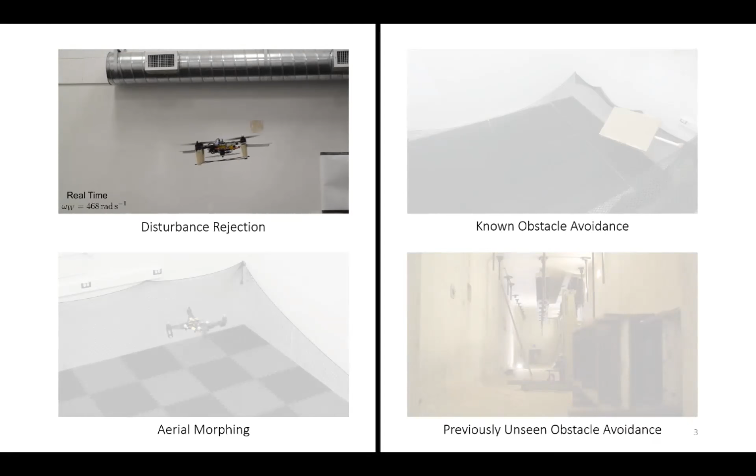If these videos are a little hard to see, don't worry, we'll watch them in much more detail later in the talk. Then we'll look at a second type of vehicle that's able to change its shape mid-flight, and discuss how this enables the vehicle to do several different tasks that a normal quadcopter wouldn't be able to accomplish.

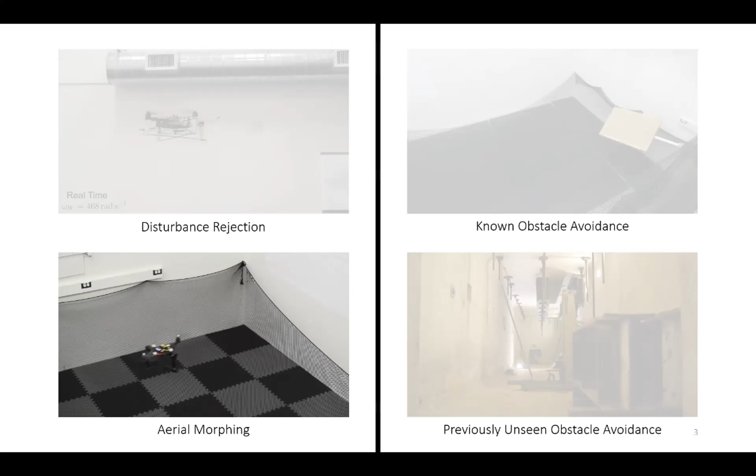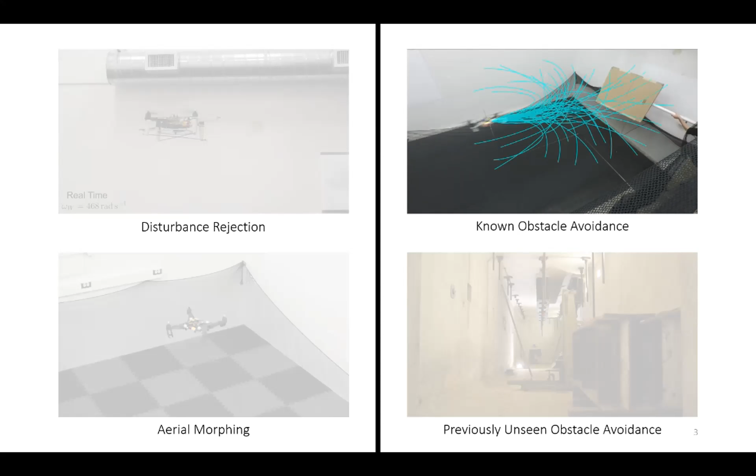In the second half of the talk, shown on the right, I'm going to discuss 2 novel collision checking algorithms I've developed to enable autonomous flight using computationally constrained hardware. More specifically, I'll first talk about an algorithm used to detect when a candidate quadcopter trajectory is going to collide with a convex obstacle, and how to do that very quickly.

In the second project, I'll look at how we can extend that type of collision checking into environments where you have previously unseen obstacles—where you're using, in this case, depth images from an onboard camera to navigate through environments autonomously.

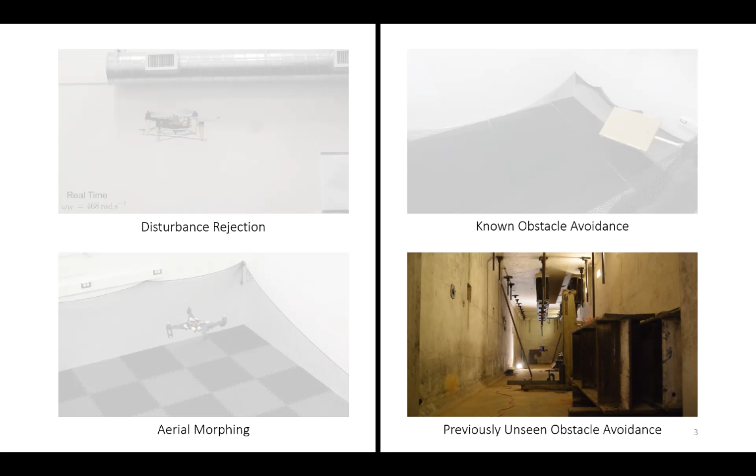Before we dive into the details, it's important to highlight some key parameters that affect quadcopter designs, so everyone has an idea of what we want to be thinking about when doing these incremental modifications. This is by no means a comprehensive list, but it's kind of how I would think about doing quadcopter design. Specifically, ideally we want a vehicle that can fly for a very long time, has reasonably high agility, and also a very low cost.

There are different ways of achieving these goals, but at a high level, ideally what we want to do is minimize the mass of the vehicle without significantly reducing the maximum linear and angular acceleration the vehicle can produce, and ideally not add any super complex mechanisms.

What about payload? Yeah, I guess that would go into low mass. Are you talking about... yeah, I guess the usefulness of these vehicles is adding certain payloads. So the lower the mass of your vehicle, the more budget you have for adding a payload. No, what I meant is you might want to increase the mass so that you have enough power to pick up a 5 kilogram package. I mean, lowering the mass by itself... Oh, I should specify, I'm talking about a specific size of vehicle. If you need to carry something very heavy, perhaps you move up in vehicle size, which would increase the mass, right? But given that you say, okay, this is my vehicle and I want to keep it this size, and carry this payload, then starting from that point, you don't want to be using steel arms or something that are super heavy.

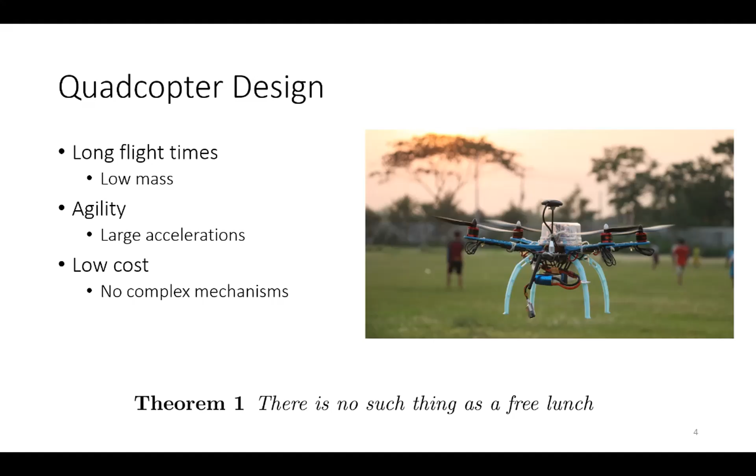I'm going to start by talking about this first project. In this case, we're really interested in flying quadcopters in very extreme environments. This started out by thinking about how we would fly a quadcopter in, for example, a hailstorm, or near a tornado where there are very large wind shear forces. Specifically, in this case, I'm only going to focus on environments with large torque disturbances, and the way we're going to reject those torque disturbances is in part by using this angular momentum wheel.

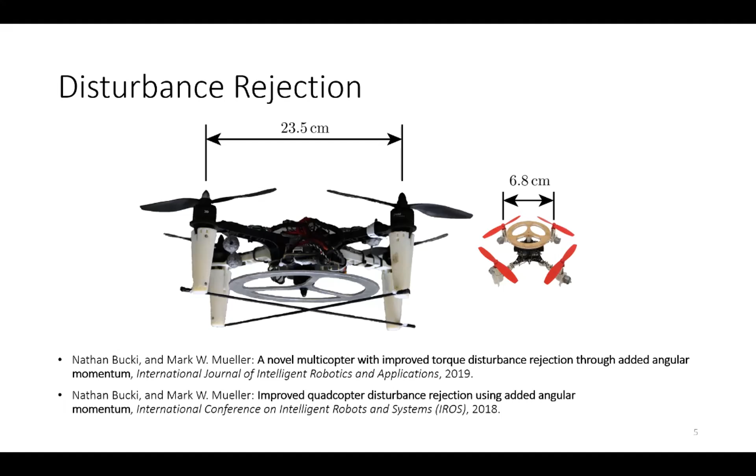Here on the left, you can see this small wheel attached to the bottom of this vehicle. I'm also going to show a little work on a much smaller vehicle, which has a tiny cute momentum wheel on top, mostly just to show that this effect scales quite well with changing vehicle size. The main reason we're using angular momentum in this case to reject torque disturbances is that this effect scales with the speed of the wheel. So rather than needing to increase the mass of the wheel to reject larger torque disturbances, you can simply spin the wheel faster, which is quite a nice property.

I'll start by showing what this looks like in practice, and then we'll go a bit into the math, or how it works. Here I'm first going to show a small ball bearing being dropped on the vehicle from above. We've added these little paddles here, which basically simulate an impulse torque disturbance on the vehicle. In this first case, the vehicle is shown with the momentum wheel not spinning, so this is basically a conventional quadcopter. You can see how that impulse torque disturbance affects the vehicle.

Now, with the wheel spinning, you see the vehicle produces this much more oscillatory motion. I'll show this video twice: on the left is the vehicle without the wheel spinning, a conventional quadcopter, and on the right is the vehicle with the wheel spinning. The interesting thing that happens is by modifying the dynamics of the vehicle, we've coupled the roll and pitch states, which means our thrust direction oscillates around what it originally was after that impulse torque disturbance was applied. This allows the vehicle to keep its thrust direction closer to vertical and reject these disturbances more easily.

Would you want that wheel to be spinning all the time, or would you want to detect that a disturbance has taken place and then quickly start spinning it?

Right, so once the disturbances happen, it's too late. But one nice property of this is you can turn the wheel off. So you can imagine a situation where if I want to be super agile and fly through a forest, I can turn my wheel off, and then essentially it's just extra mass that I've added. And then if I want to do some station keeping, I can spin the wheel up and just hover in a desired position and be able to reject those disturbances.

Is it really too late once you detect a small change? Is it too late to quickly start spinning that? It kind of depends. It does take some time to spin the wheel up, and as you're spinning it up, that also applies a yaw torque. So if you were to spin it up quickly, you're applying this very large yaw torque that you'd also have to compensate for.

How fast is that spinning? For the large vehicle, we're spinning at 468 radians per second. For this small one that I'll show, it's 1,000 radians per second. I'll talk a little bit later about how we chose those numbers—it's kind of interesting.

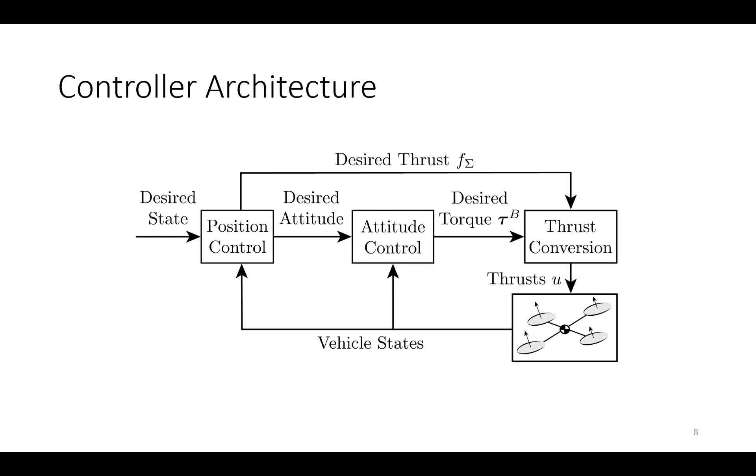So this is assuming that we have a constant wheel speed. And what we kind of see is that as we increase the angular momentum of the vehicle, our roll and pitch states become more coupled. And so that's what's introducing that oscillatory motion that we saw earlier when we applied the torque impulse disturbance.

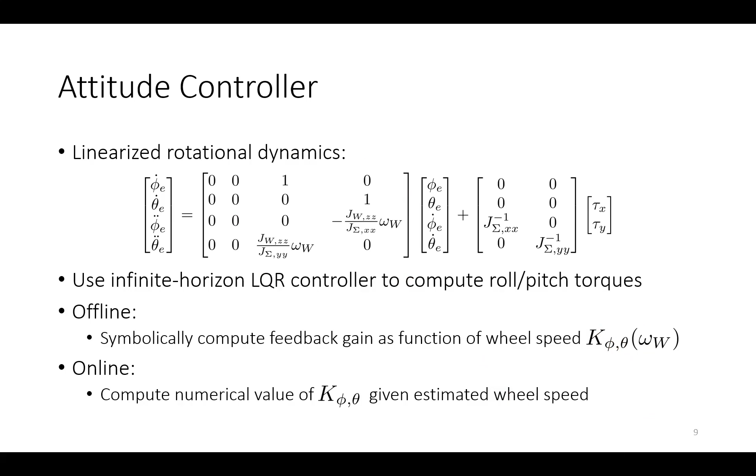But once we have this model, it's very straightforward to synthesize an infinite horizon LQR controller, which is what we use for the vehicle. And more specifically, there's a nice feature of this structure in that we found we can compute the infinite horizon LQR feedback gain K symbolically as a function of the wheel speed. So the idea is as I'm spinning my wheel up or down, I modify my feedback gain matrix accordingly, and I do it in a way that doesn't require solving a Riccati equation online. So you can implement this on very cheap microcontrollers without any fancy computers.

So yeah, the follow-up question is then, okay, this is great in experiment, but theoretically, does this actually improve the torque disturbance rejection? And it turns out, yes, it does. And the way we show that is using an H2 norm analysis. If you're unfamiliar with the H2 norm, this is basically considered the cost to recover from an impulse torque disturbance.

So if our cost is defined as such, where X is our roll rate and pitch rate states, and tau is the roll and pitch torques that we apply by the propellers, basically we see as we increase the angular momentum of the vehicle, so as we spin the wheel faster, the cost required to recover from that impulse roll or pitch torque monotonically decreases.

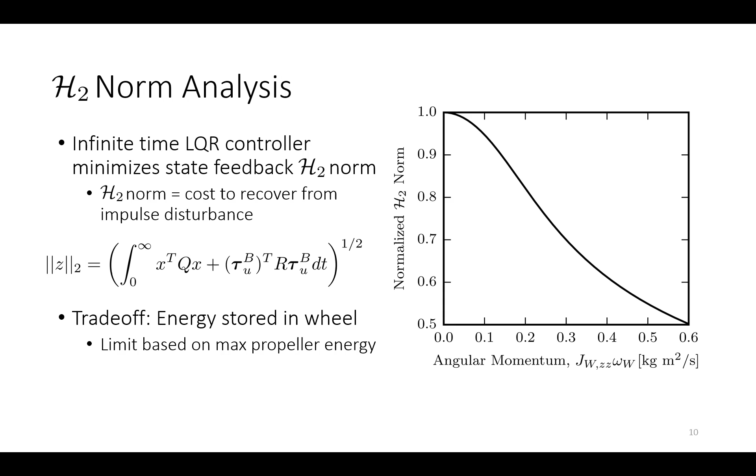So you might be thinking, oh yeah, this is great, that means I'll just spin my wheel as fast as I possibly can and I'll get the lowest torque disturbance sensitivity. But of course the problem you run into is that you're storing a lot of energy in your momentum wheel. So as I mentioned earlier, I was going to talk a bit about how we chose those numbers for the wheel speed. In this case, we're only putting as much kinetic energy into the momentum wheel as is, I think, either equal to or twice the maximum kinetic energy that can be stored in the propellers. So the idea is we want to keep this vehicle in the same safety class as a conventional quadcopter.

Yeah, so just kind of wrapping up, talking about the specific project, the big picture takeaway here is that the sensitivity to torque disturbances of a quadcopter will monotonically decrease with increasing angular momentum. But of course, by the no free lunch theorem that I mentioned earlier, the price we pay for this improved torque disturbance sensitivity is that we necessarily must slightly increase the mass of the vehicle.

But the benefit of this is because we're using angular momentum as our mechanism for torque disturbance rejection, that angular momentum scales with the wheel speed. So in principle, you could imagine a vehicle with a very lightweight wheel that spins very quickly. But of course, the lighter we make the wheel, the more energy we have to store into it for the same amount of angular momentum. So there's some trade-off to be decided there.

I'm going to stop briefly. Are there any other questions about this project before I move on to talk about the morphing vehicle?

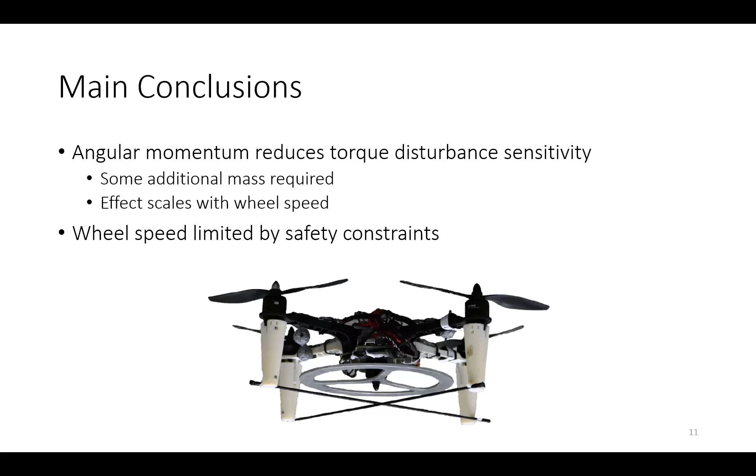So now we're going to discuss the second design tweak to the quadcopter. In this work, I'm going to describe a novel design that uses unactuated hinges to enable flight in a few different new configurations that enable the accomplishment of some of these tasks. I'll show videos of all of these tasks, so don't worry if these pictures are a bit confusing. This is largely from our most recent journal paper, which we submitted to TRO, although this vehicle is a superset of our previous conference paper that we published.

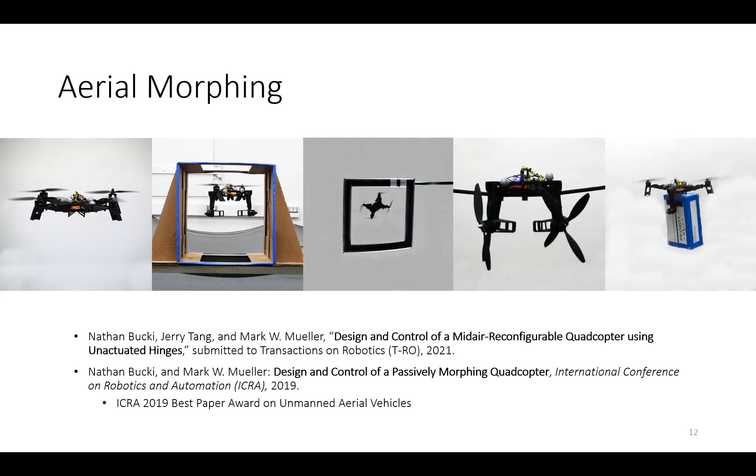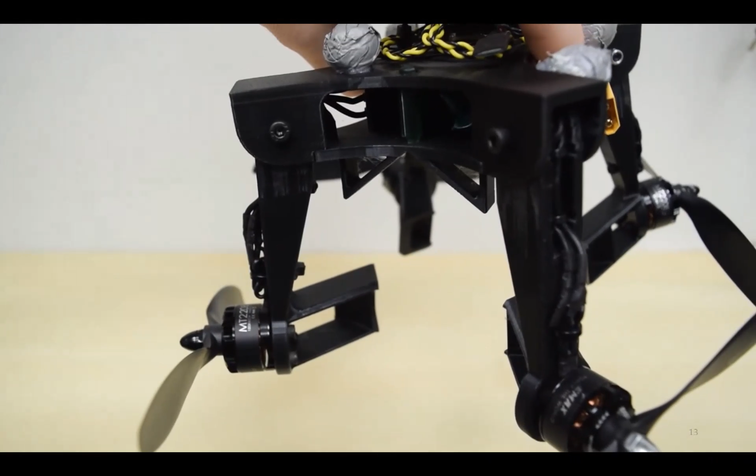So basically the main idea behind this vehicle is that it differs from a conventional quadcopter in that each of the four arms are connected to the central body via an unactuated hinge. We're not adding any special sensors that can measure the angle of the arms, we're not adding any other special components. This vehicle really is exactly the same as a conventional quadcopter, except for these hinges. That's really the only difference.

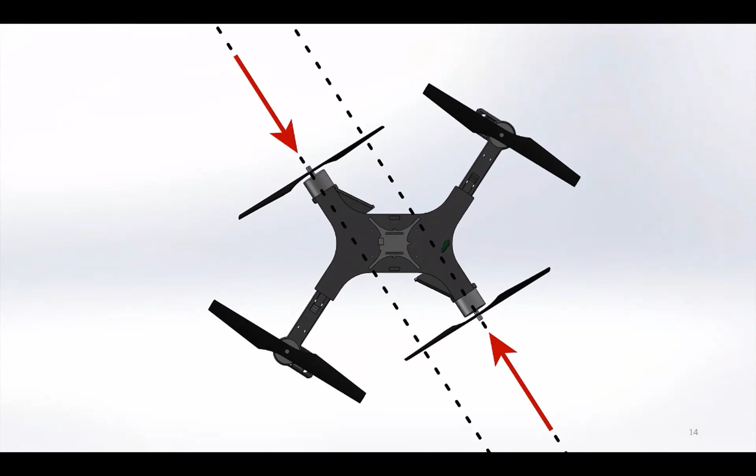And what we can do by adding these hinges is hover in a new configuration with two arms folded. We achieve this by reversing the thrust direction of the propellers attached to the two folded arms. And now, because the vehicle is designed such that those thrust axes are offset from one another, a yaw torque is produced that counteracts the yaw torque produced by the two unfolded arms. So previously we couldn't hover in this configuration, but now we can using this under-actuation.

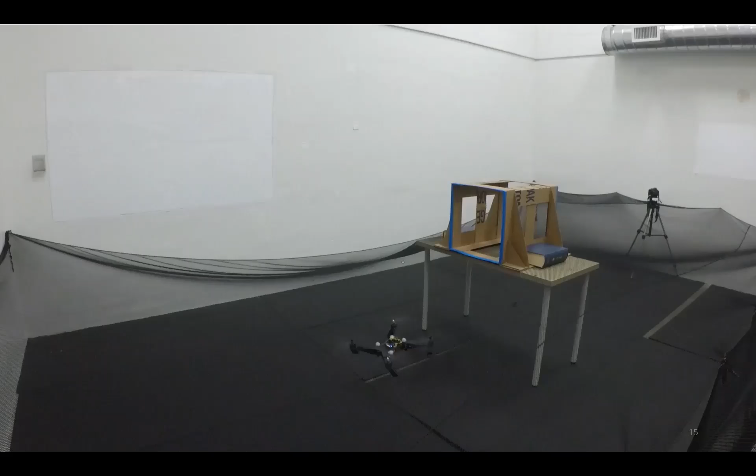So we can utilize this in a few different ways. Specifically here, we show the vehicle transitioning to the two arm folded configuration in order to traverse a narrow tunnel. Because the horizontal dimension of the vehicle is significantly reduced when flying in this two arms folded configuration, we can access areas that a conventional quadcopter would not be able to. In this example, the vehicle can't traverse the tunnel in the unfolded configuration, so in your hover state, you basically have to fold your arms if you want to go through.

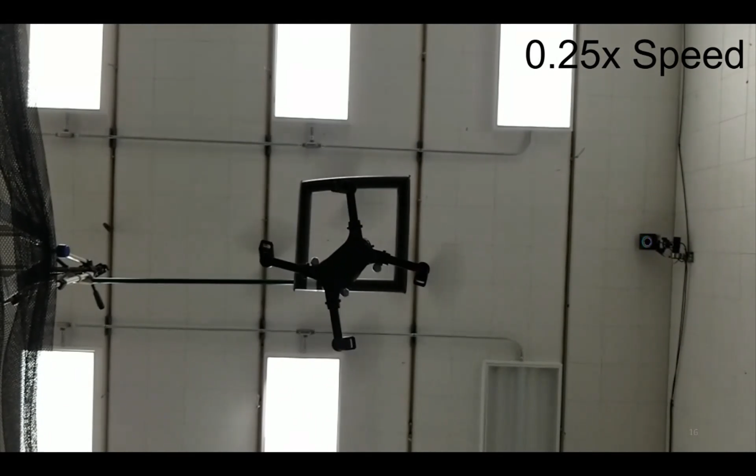Additionally, you can do other fun things such as traverse narrow vertical gaps by folding all four arms at once. Here, after a quick trajectory used to gain upward velocity, we reverse the thrust direction of all four propellers, which folds all four of the arms. While the arms are folded, we're controlling the attitude of the vehicle by varying those reverse thrusts. Then finally, we reverse the thrust direction of the propellers again, which allows the vehicle to return back to its conventional quadcopter mode.

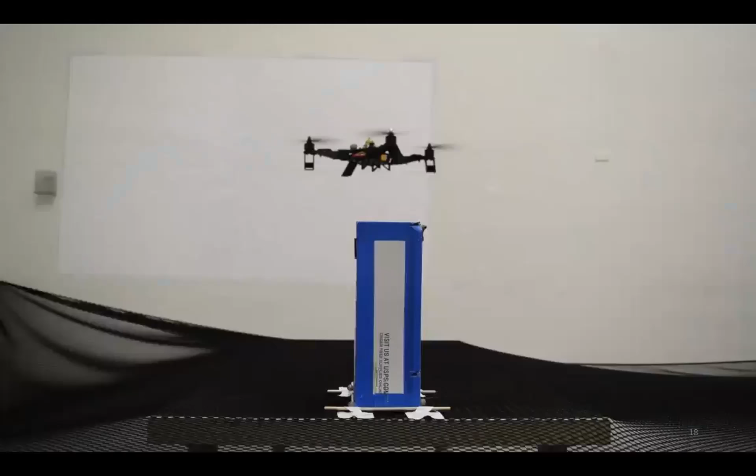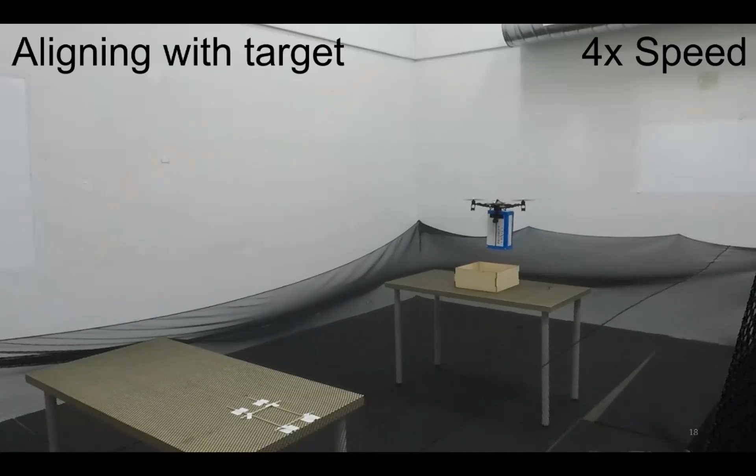Another interesting thing we can do is perform some very limited grasping. Here I'm showing the vehicle moving a box from one location to another. After we land, the two folded arms can be used to firmly pinch the box and then move it to a different location. I'll note that this is a very restricted task — it requires a very specially sized box, and of course, the mass of the box is also tightly constrained by the maximum vertical thrust that can be produced by those two unfolded arms when flying in the two arms folded configuration. But again, you kind of get this for free when you have a vehicle like this.

So just to reiterate, the main idea behind this design is that because it's almost identical to a conventional quadcopter — it only differs in the use of those hinges — we have basically the same power consumption of a conventional quadcopter when flying in the unfolded configuration. I'll talk about this next point a little later, but basically the thing you lose is your yaw agility when you add these hinges. I'll specify exactly why in a bit.

So the ideal use case for this vehicle, you could imagine, is if you're doing a search and rescue operation where you need to fly a very long time in the unfolded configuration, but then you reach a building with a doorway or a window or something too narrow to traverse. You can transition easily into this two arms folded configuration, pass through the doorway or window, and then return to your normal, very efficient operation in the unfolded configuration. So that's I guess the main idea of this project.

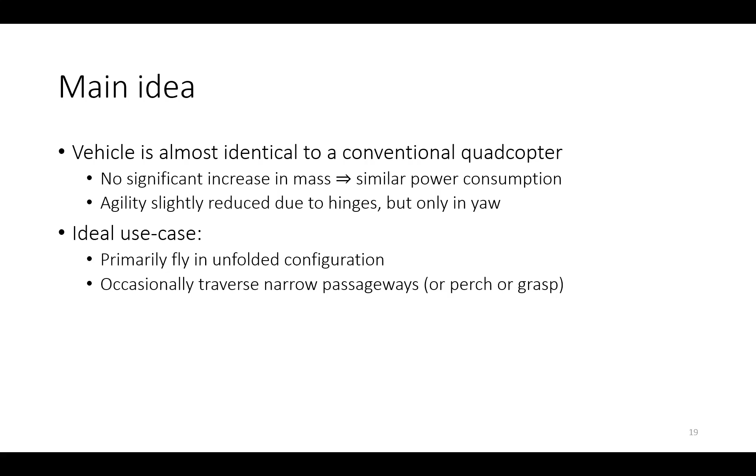So I'll very quickly discuss how this differs in terms of control from a conventional quadcopter. Here we have the exact same control structure that we used for the momentum wheel vehicle, but in this case, we're going to modify this thrust conversion block as well as our attitude controller. This comes from the fact that when we're flying in the two arms folded configuration, our geometry is much different — so the mapping from individual thrust forces to the total thrust in the Z direction, about the yaw axis of the vehicle, and the roll, pitch, and yaw torques will be very different. Correspondingly, we will need to modify our attitude controller to account for that as well.

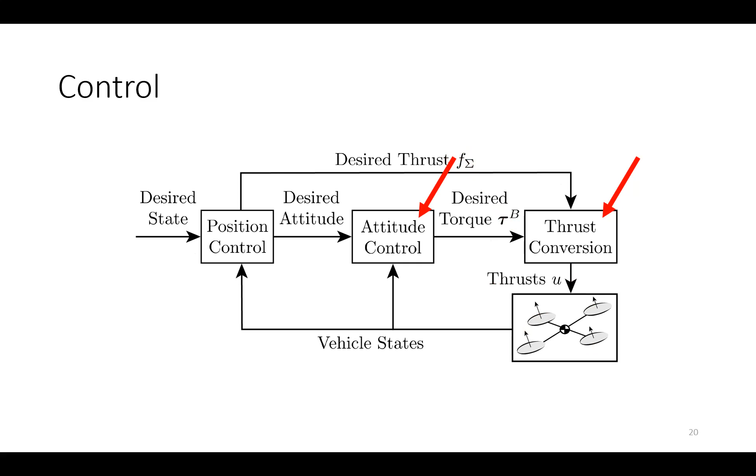I will note very briefly, there are many other controllers you could use — some nonlinear control, some model predictive control. This is just the simplest thing you can do. So there are different ways of doing this, but this is just one way. For the thrust conversion block, this really only depends on the geometry of the vehicle. What we want to do is find a mapping, which turns out to be linear, from our total thrust F sigma and our roll, pitch, and yaw torques here to X, Y, and Z.

And we want to find how those are related to our individual thrust forces. This can be easily computed just from the geometry of the vehicle, plus some of the properties of the propellers that you're using. It's computed as this matrix M. This is a 4x4 matrix where the first row is denoted F or M sub F sigma, which denotes how the four thrust forces relate to our total thrust in the Z direction of the vehicle. Then the bottom three rows are M sub tau B, which relates the four thrust forces to your roll, pitch, and yaw torque.

So as long as this mapping is invertible, we can convert our total thrust and body torques into individual thrust forces. As it turns out, as I mentioned earlier, the two folded arms must have their thrust forces offset. This matrix is only invertible when you have that offset. So you basically need your vehicle to look a little bit more like an H than an X, that's a way to visualize that. This will be different for each configuration.

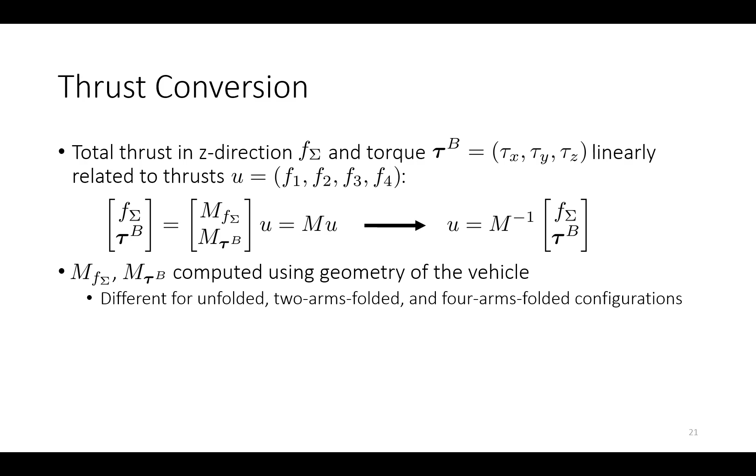And then once you have that mapping, you can use it to very easily synthesize your attitude controller. In this case, again, we're using an infinite horizon LQR controller. You can use other types of controller if you want. This is kind of the easiest thing that you can do that's easily implementable on microcontrollers.

So here our cost for our LQR controller has our states X, which are roll, pitch, yaw, and roll rate, pitch rate, and yaw rate. In this case, Q is just a diagonal matrix where we have a higher cost for our roll and pitch states, as again, we want to align our current thrust direction with the desired acceleration direction that our position controller gives us.

In terms of our input cost, this is the roll, pitch, and yaw torques times this cost matrix R sub tau B. So normally for a conventional quadcopter, this would just be diagonal, perhaps adding an additional cost on the yaw torque, as the yaw control authority of typical quadcopters is usually small.

But in this case, for the 2 arms folded or the 4 arms folded configuration, we don't want this to be a diagonal matrix. We want it to be weighted based on the geometry of the vehicle, which you can do very easily in this way.

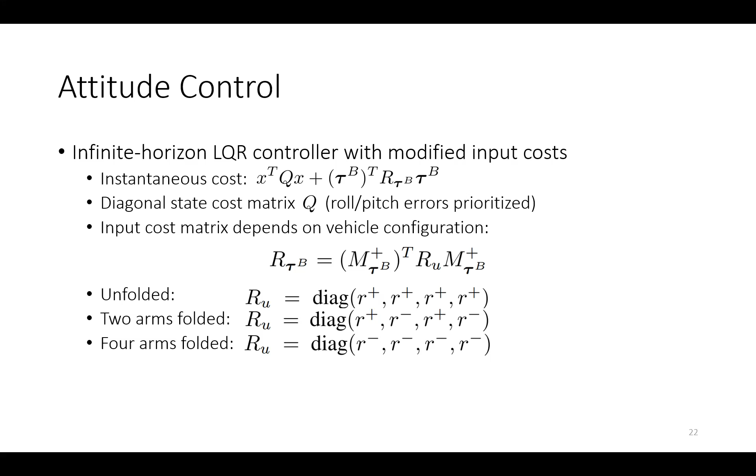So one more slide about math, and then we'll go back to cool robot videos.

So kind of the last piece of the puzzle then is, okay, if we design our attitude controller assuming a specific geometry, how do we ensure that that geometry is actually valid? Because there's no actual constraints to prevent the arms from folding or unfolding, no physical constraints. So we need to account for that using control theory.

As it turns out, if we look at the vehicle dynamics, which I won't detail here for brevity, under some mild assumptions we find that there exists a linear bound in terms of our total thrust and our roll, pitch, and yaw torque that, when satisfied, prevents the arms from either folding or unfolding, depending on which configuration you're in. These constants, CF, CX, CY, and CZ, can just be computed using the geometry of the vehicle, as well as how the mass is distributed and the moment of inertia of the vehicle.

But once we compute this bound, it gives us a way to ensure that, for example, if we're flying in the unfolded configuration, the arms will not suddenly start to fold. And so as long as this bound is satisfied, we can use any existing quadcopter trajectory planning, controllers, whatever you want. The only extra thing we've really added is this bound on your control inputs. So what this translates to is basically a reduction of the maximum yaw torque of the vehicle.

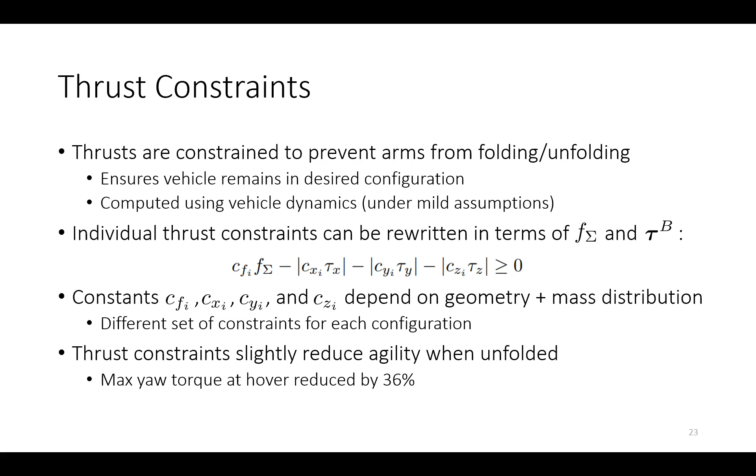Again, the idea here is that by adding these additional degrees of under actuation, we can reduce the size of the vehicle when flying in this 2-arms-folded or 4-arms-folded configuration, and perform a few other tasks, and the drawbacks really aren't too bad. So you have this small reduction in yaw torque, but in terms of power consumption, it's almost identical to a conventional quadcopter when flying in the unfolded configuration. Although there is also a somewhat small increase in mechanical complexity by adding these 4 hinges.

I'm going to pause here again. Does anyone have questions about this project? Otherwise, we'll move on to talking about some of the path planning projects.

Yeah, a quick question. Can you comment on what type of controller you're using in between the transitions?

Yeah, so the transitions happen fast enough that we don't actually do any control. That's also kind of complicated by the fact that we have no sensors to sense the angle of the arms, so it'd be very difficult to actually do control during the transition.

But it happens fast enough that you can basically just switch controllers and then recover very, very quickly. So basically, you use the second controller to hopefully recover from the disturbance caused by the transition phase. Right, yeah, that's essentially the idea.

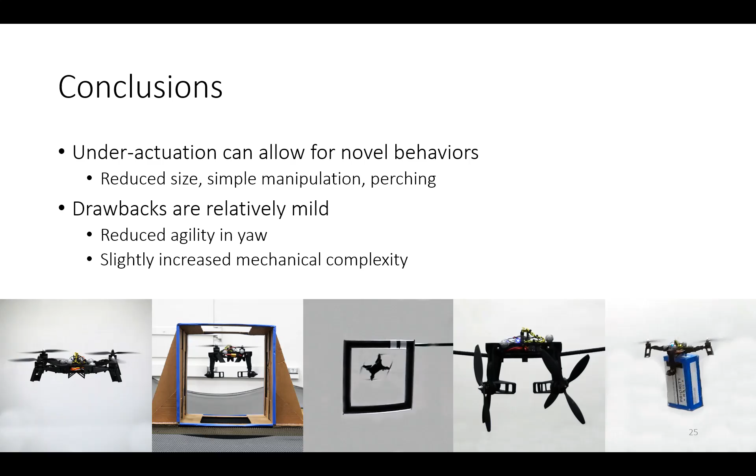All right, so now I'm going to move into the second half of the talk. Here we're primarily going to be looking at how we do very efficient continuous time collision checking between a given quadcopter trajectory and either convex obstacles, or later on I'll show for some previously unseen obstacles. This first work is from a conference paper, and basically is the basis for the follow-on work that I'll show a little later.

Actually, I'm going to skip this video for now. So the idea behind the planner we're using in this case is the tried and true method of doing sampling-based collision avoidance. We're only going to be considering algorithms of this type, where we basically generate some candidate trajectory.

In this case, we're generating these by randomly sampling positions in 3D space, and then finding trajectories that bring the vehicle from its current position to those positions, ending at rest, so ending with 0 velocity and 0 acceleration. Once we have generated some candidate trajectory, we can evaluate its cost. For this work, we're using average jerk, so that enforces a sense of smoothness of the trajectories. Then after we check whether it's a lower cost than the previously found lowest cost collision-free trajectory, we will check whether it collides with the obstacles.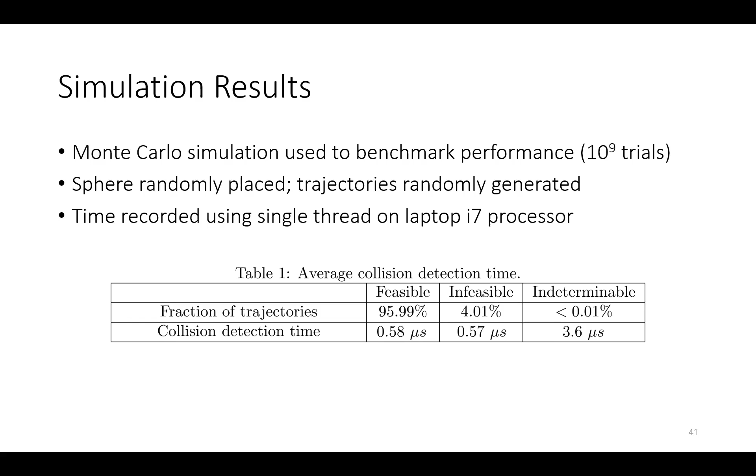So I skimmed over a lot of stuff in this work just to cut down on time. But the key takeaway here is that we can do continuous time collision checking very fast using this special property of fourth order polynomials and the sequential linearization of obstacles. And this also avoids a lot of the discrete time collision checking pitfalls.

Normally, if you were going to do collision checking, you would discretize your path and then check each of those points for collisions with obstacles, which means you might not detect collisions with thin obstacles. It also makes checking with dynamic obstacles a bit difficult, but in this case, we can very easily deal with both of these problems.

Stop one more time for questions here. Otherwise, I'll move on to our extension of this work into the unseen obstacle domain.

All right, cool. So let me check how much time I have here. Oh, okay, I'll try to hurry up.

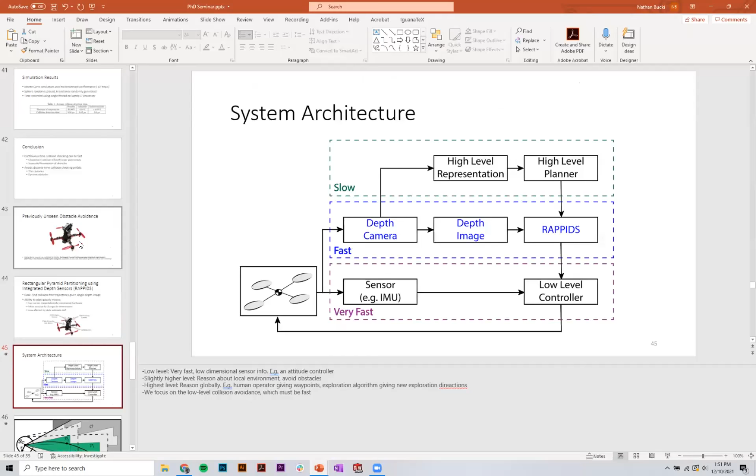So why is my picture not showing up here? Hold on, let me reset this real quick. Okay, you should be able to see a picture of a quadcopter now. I don't know why it glitched out there.

Looks good now, yeah. Cool, so in this section, we're going to be talking about an extension of the work that I just discussed.

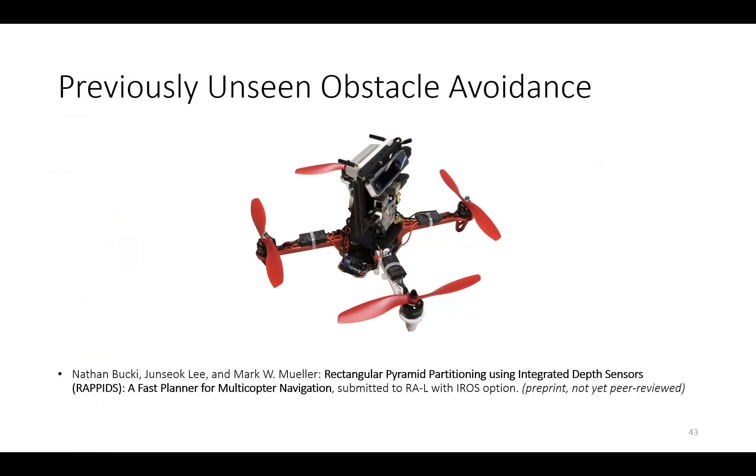Specifically, this algorithm that I developed called rectangular pyramid partitioning using integrated depth sensors, or RAPPIDS for short. The goal here is that if we have a vehicle that has a depth sensor on it, how can we plan collision-free trajectories very quickly given a single depth image from that depth camera, in a way that can be run on very computationally constrained hardware.

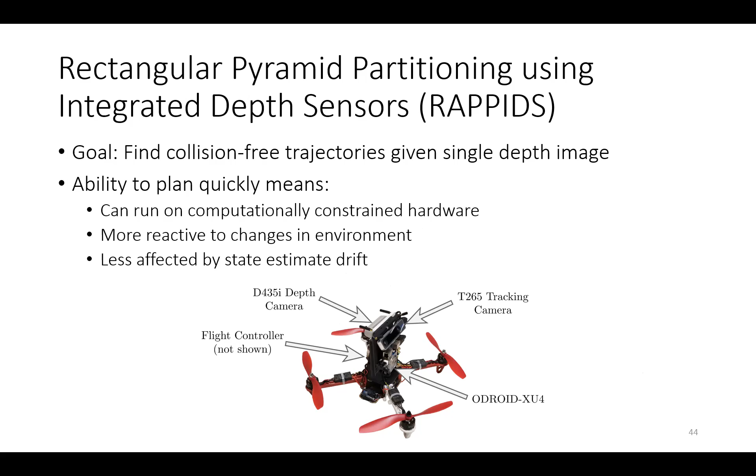So rather than having a vehicle that requires a laptop level processor on board to fly autonomously, we want to be able to use very cheap, very low powered computers to still achieve very reactive autonomous flight. So the system stack, if you will, for this vehicle looks as follows.

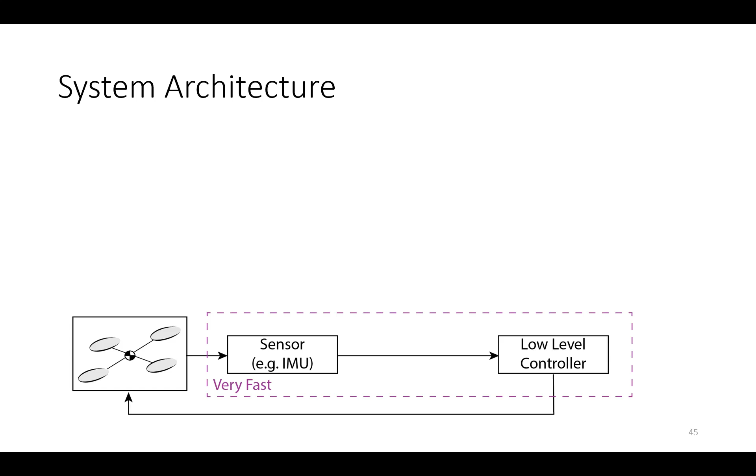So here we have a very fast low-level controller. This would be something similar to what I showed in the momentum wheel and folding arms project, where we're just doing basically attitude control here and trajectory tracking.

Above that, we would have a slightly slower but still quite fast layer that's tasked with doing collision avoidance. So here we have some sensor that's able to sense obstacles in the environment, turn them into some other low-level representation that then can be used for doing collision avoidance over the horizon of, say, the next few seconds.

And of course, on top of that, typically you'd have some higher level planner. For example, this high level planner could be a human giving waypoints to the vehicle, or maybe it's some exploration algorithm that's giving new exploration directions to the vehicle.

But the assumption here is that this is very slow and does not deal with obstacle avoidance. So in this work, we're specifically looking at this middle layer where we're getting depth images from a depth camera, and then finding collision-free trajectories that ideally are chosen such that they achieve some goal given by the high-level planner.

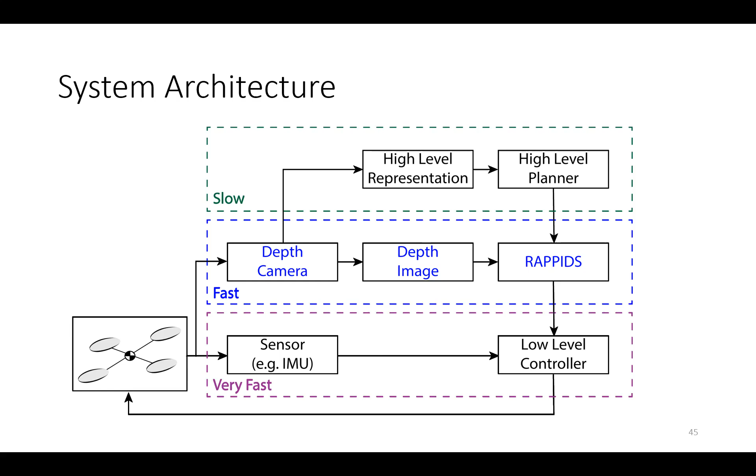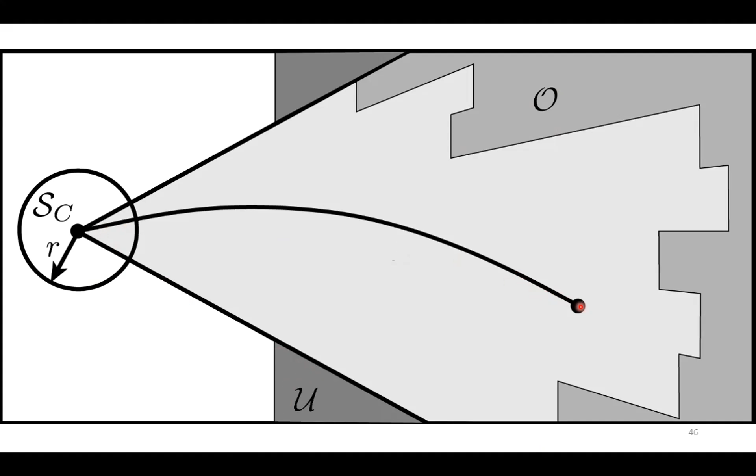There's more details in the paper on how we actually generate these pyramids, but once we've generated this pyramid, we ensure that it contains the endpoint of our candidate trajectory. So the idea here is if I were to sweep my sphere along this candidate trajectory while it's inside the pyramid, I should not collide with obstacles or the unknown space, if that makes sense.

So the trick here is once we've got this pyramid that describes the free space, it's basically trivial to detect where our trajectory collides with the lateral face. Reason for this is that we're using fifth order polynomials to describe our trajectory.

And we already know where one of the roots is. So at time t equals 0, we know that one of the zeros of that, the equation for the distance of the trajectory to the lateral face of our pyramid is at time t equals 0. Sorry, that was a bit of a mouthful.

And so then finding where the trajectory collides with the lateral face of the pyramid amounts to solving a fourth order polynomial, which again, we can do in closed form in constant time.

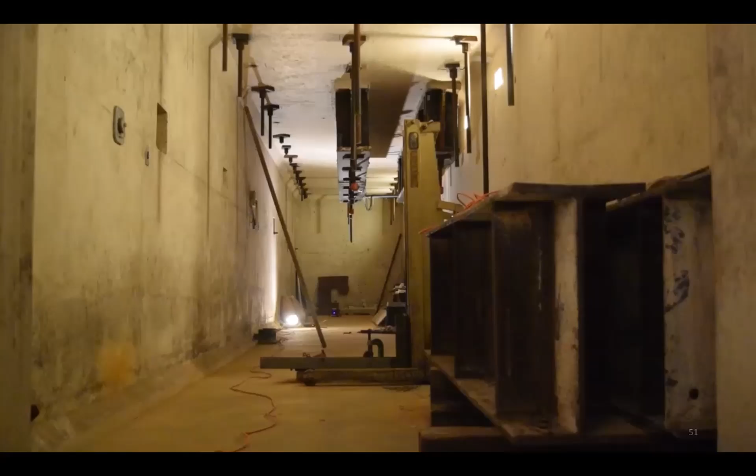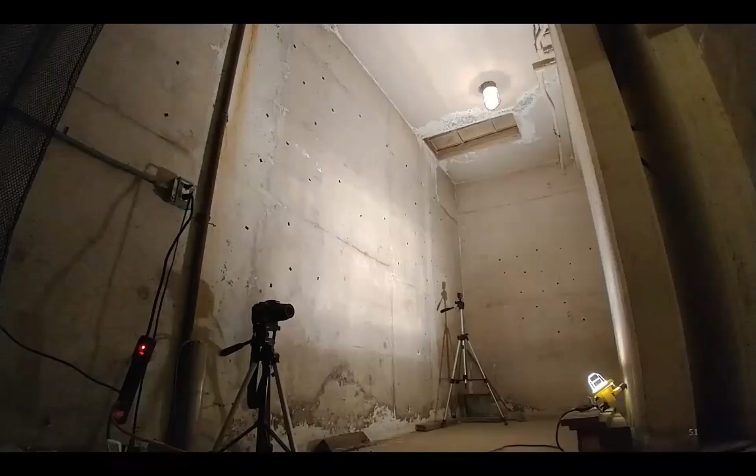So in these videos that I'm showing, the vehicle is totally autonomous. Here we're capturing depth images at 30 Hertz, and then we're running our planner for 30 milliseconds after each depth image arrives. In this case, the cost function we're using is basically: we want to move as fast as possible down the hallway until we can't find any collision-free trajectories, at which point we turn 90 degrees and continue.

And so here the hallways are about 20 meters long, about 2.5 meters in width and height. And the idea is this low-level rapid planner is giving us a collision avoidance guarantee, and someone else can design some high-level planner where they don't have to worry about doing collision avoidance.

In this case, for each depth image where we were able to find a collision-free trajectory, we evaluated about 2,000 candidate trajectories, and on average generated about 3 pyramids. So that tells you it's pretty easy to describe this complex space using a low number of pyramids, and that allows you to check thousands of trajectories for collisions. Some other statistics: we're traveling about 40 meters in 43 seconds with a maximum velocity of about 2.6 meters per second. Not incredibly fast, but still quite quick.

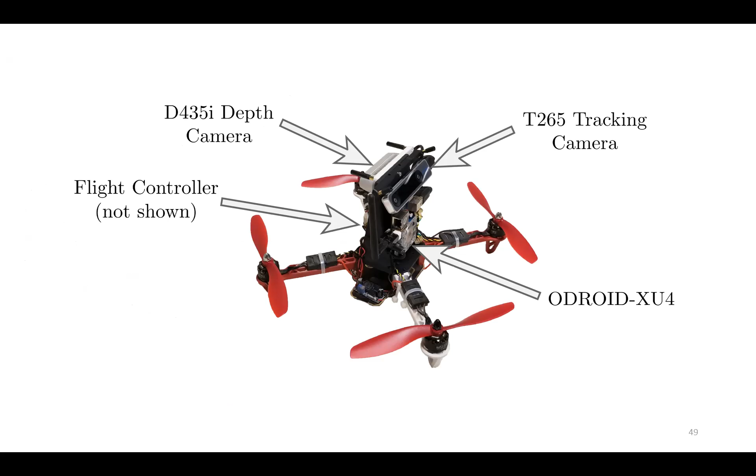Hey Nathan, can you hear me? Yep. So I was wondering, for the first project you had, the momentum wheel, why didn't you do that with a propeller, so you'd have extra thrust?

Yeah, I think that's an interesting idea. There was someone else who had done similar work, though I don't know if they made much progress on it. One of the problems with using a propeller is that you'd then be generating very large yaw torque, since there's air drag on that propeller, and the yaw torque of the vehicle wouldn't be balanced anymore.

There's ways around this. Currently for quadcopters, you have 2 propellers that spin clockwise and 2 that spin counterclockwise, so the yaw torque is balanced. You can imagine a vehicle where I have one big propeller as my momentum wheel and 4 smaller ones, maybe spinning the big one clockwise and all the smaller ones counterclockwise. But in the current form, you wouldn't want to be constantly counteracting the yaw torque produced by the momentum wheel. I see.

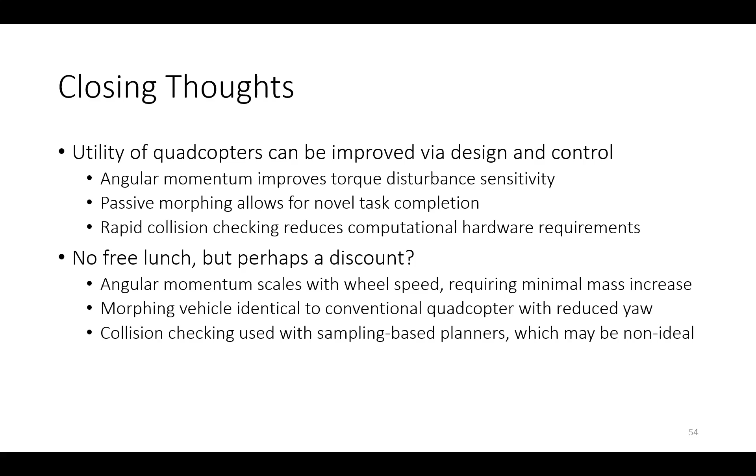I'll try to keep this short, but no PhD seminar would be complete without acknowledging all the help I've gotten over the years. Mark, you've been such a fantastic mentor. I'm really grateful for the time you spent helping me improve both my technical abilities and giving fantastic advice regarding my PhD and career. I was extremely excited to join your lab, and I gotta say the excitement never really went away. Thanks for making my time here really memorable.

I also want to thank my lab mates. I've had a blast working in the lab, everyone's been super supportive and willing to help me solve even the smallest problems. I really enjoyed befriending you all, and I hope we stay in touch for many years to come. With that, I'd like to conclude my talk, and thank everyone in the audience. A lot of my friends showed up, you've really made my time at Berkeley quite special. I'll stick around for questions, but that should conclude the talk.